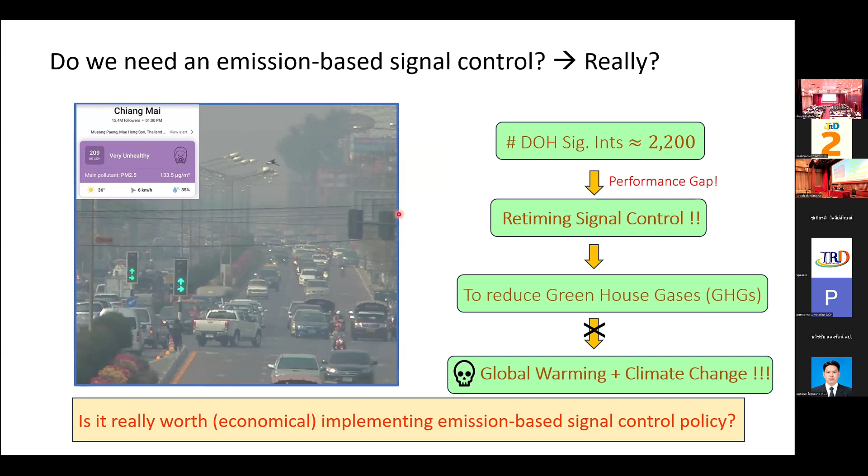Okay, so my presentation today is about emission-based signal control policy. Is there economic justification? First of all, let's take a look at this picture. This picture on the left, I took this picture in Chiang Mai a few years ago, and you can see from this picture it's a little bit hazy. This is not due to fog, but it's due to PM2.5, which is very unhealthy.

Okay, you can see that from the AQI index, which is 209, which is very high and very bad for the health. And from this picture, you can also see the signal control. Okay, so one of the straightforward ways that we think about this situation is, can we somehow relieve the pollution problem by using traffic signal control? Can we do that? If we can do that, it's a very straightforward way to do it.

Okay. In my Department of Highways, we have tens of thousands of intersections, but about 2,200 signalized intersections. So we aim that maybe we can do something with those signalized intersections. But there is a more fundamental question that we have to answer before we do it. Is it really worth economically implementing emission-based signal control?

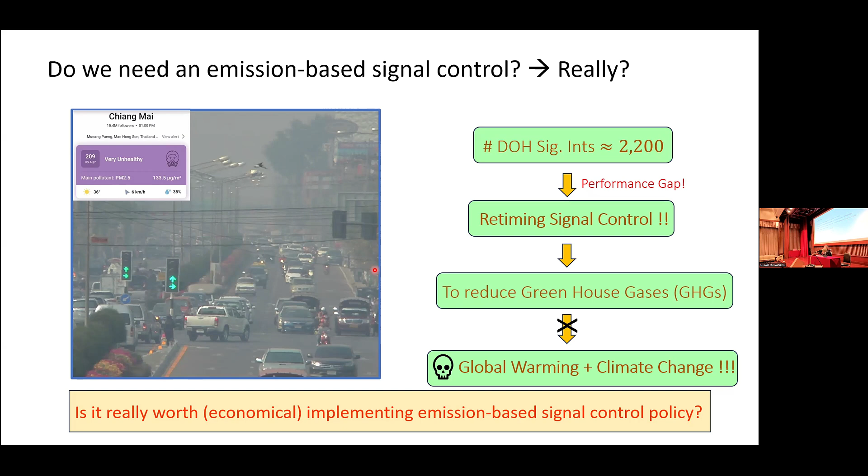This, I think, is more fundamental than doing it, because if you are studying traffic flow theory, especially in traffic signal control, you see many signal control algorithms. Okay, but I think this is a more fundamental question that we should answer before we proceed. So this is an overview of my presentation. First, I will talk about emission and delay signal control in brief.

Okay, then I will talk about the intersection fundamental diagram and the emission intersection fundamental diagram, which is similar to the macroscopic fundamental diagram. And I think MFD is very well known to most traffic engineers. And then I will talk about the marginal external cost of emission and congestion ratio based on the intersection fundamental diagram. And I will use this ratio as a guiding indicator whether we should minimize delay or whether we should minimize emission.

And then I will talk about some observations in Bangkok. And thanks to the Bangkok Metropolitan Administration, and I think someone from BMA is here today, thank you very much for your help, giving me data so that I can do this research.

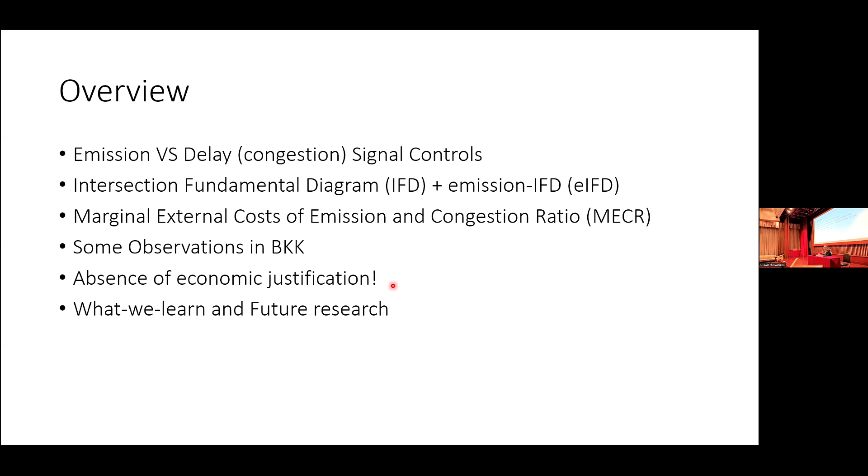And then I will talk about the absence of economic justification. And then I will summarize my presentation with conclusion and future research. So let's talk about signal control. When we talk about signal control, there are several performance measures that we usually discuss. The first one is delay. This is the most common one.

The second one is stop rate, or the number of stops per time unit. The third one is emission. And the fourth one is fuel consumption rate. Okay, the four major performance measures when we talk about signal control. And we know from the literature that when we try to minimize delay and we try to minimize emission, these two objectives give us two different timing plans.

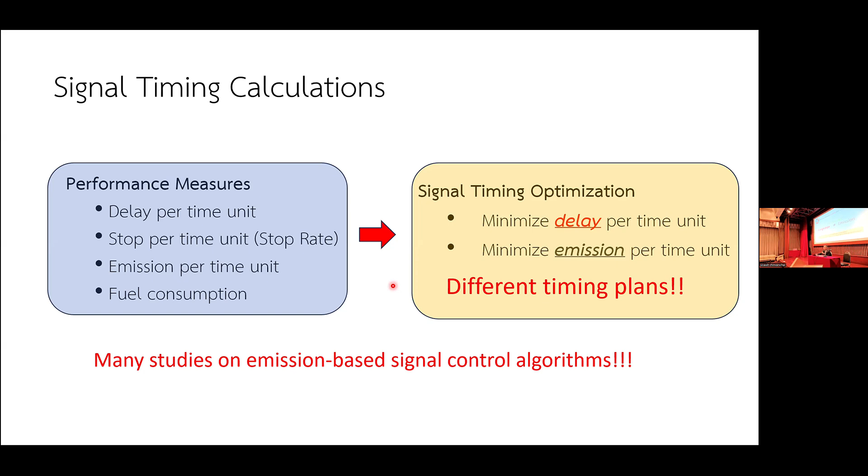Okay, and you can see from the literature, there are many studies on emission-based signal control algorithms. And I think some of the researchers in this room have, in the past, written papers regarding emission-based signal control. Okay. But when we talk about congestion and emission, we have to somehow weigh economically between the two of them. Which one is more important?

So in my study, I try to answer two questions. The first one is, is it worth implementing an emission-based signal control policy or not? And the second question I try to answer with this research is, in what traffic conditions should emission-based signal control be implemented? So these are the only two questions I try to answer.

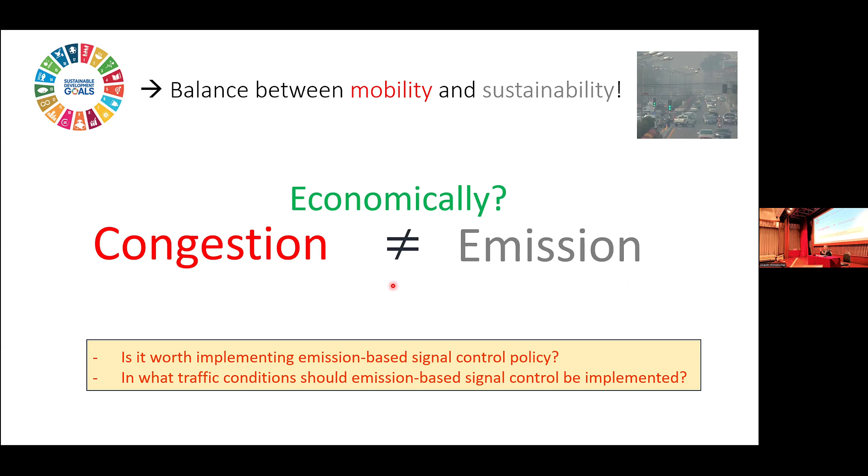First of all, let's talk a little bit about the macroscopic fundamental diagram. I think this work on MFD is very well known to everyone in the traffic flow theory field. And if someone gets a chance to read this paper by Professor Daganzo, in the acknowledgement, the data provided for this study was supplied by Kuwahara Sensei here.

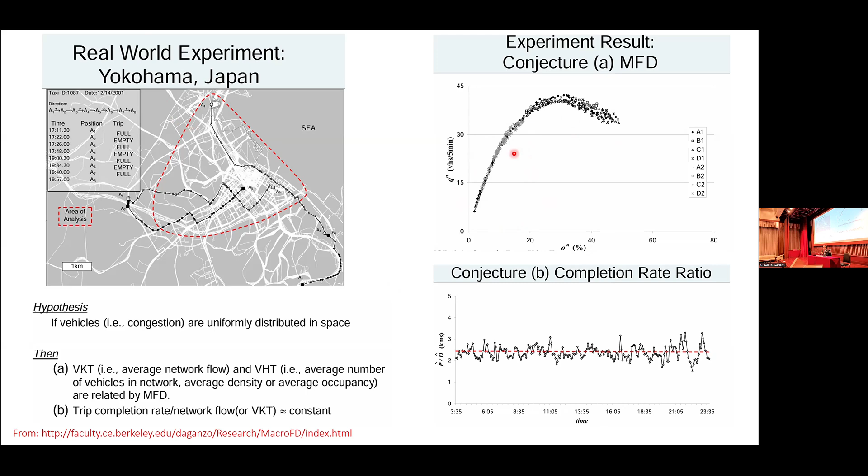So from the MFD, with certain assumptions, we can get the relationship between production and accumulation, which looks very nice like this. This is the starting point. The MFD concept applies to a network. So what I do with the signalized intersection is I scale down this concept a little bit to a smaller scale, to one intersection.

So if we have data such as the total travel distance and the total travel time that pass the cordon line that we define over an intersection, we can construct a very simple relationship between flow and density. We get something similar to the MFD, but at a smaller scale.

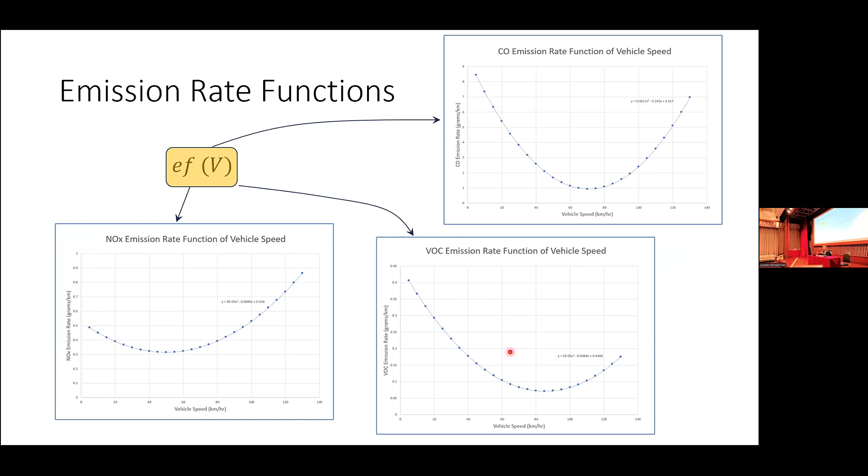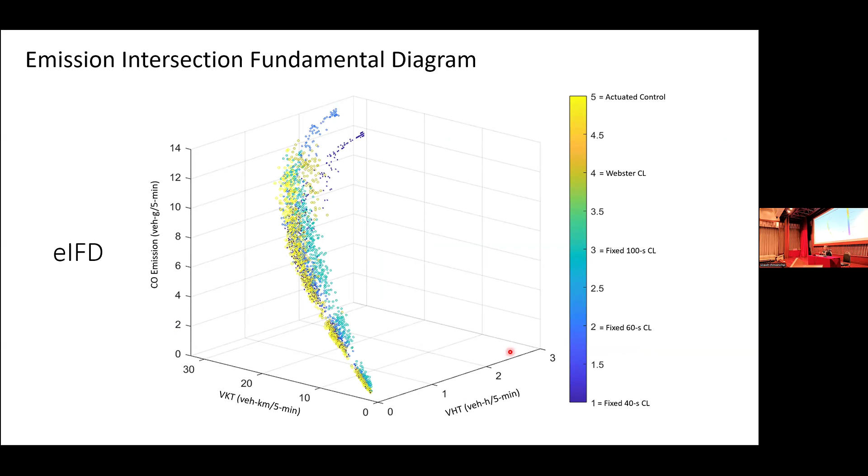And based on this diagram, we can calculate the marginal effect of adding one additional vehicle into an intersection. With this concept, we can calculate the marginal external cost of emissions and also the marginal external cost of congestion. I take the ratio of marginal external cost of emission over marginal external cost of congestion as a guiding indicator.

If this ratio is greater than 1, it means that the externality of emission is greater than the externality of congestion, so we should go forward with an emission minimization policy. But if this ratio is less than 1, the externality of emission is less than that of congestion. That means we should go forward with delay minimization optimization. So I do something very simple based on this concept.

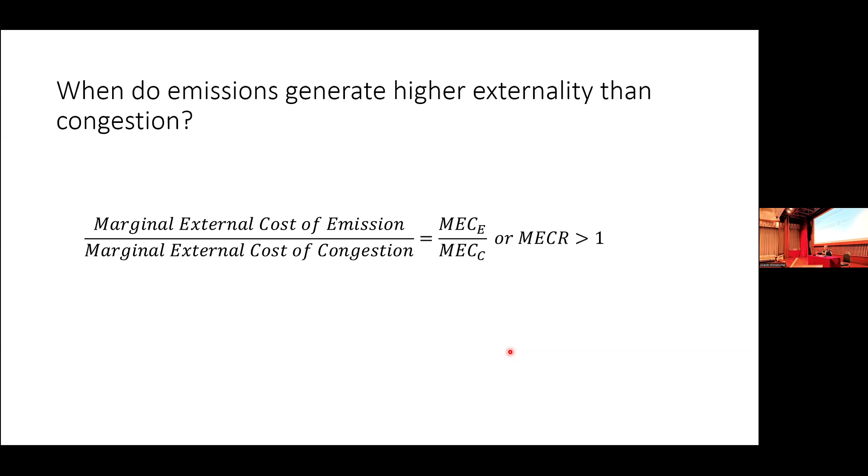I get the data from the metropolitan administration for 3 intersections, which are very near Chulalongkorn University. I think right now we are sitting somewhere in this location. These 3 intersections are very close to this location. The first intersection that I get the data from is the Charoen-Phon intersection, this one. And the second intersection is Prathumwan intersection. Some people call it MBK intersection, close to MBK.

And the last intersection that I get the data from is Ratchaprasong intersection, where when you go there you see people worshipping Phra Phrom, the golden statue, a lot of people there dancing, that kind of thing. These three intersections are among the most congested intersections in Bangkok, in the very center of Bangkok.

So I make certain assumptions for the value of time and the value of emission damage cost. I consider three types of gases: carbon monoxide, volatile organic compounds, and NOx. I got the value of the damage cost from the Pollution Control Department of Thailand. Maybe it's not relevant to other countries, but this is the most recent value that I obtained. And the value of time is from the Department of Highways.

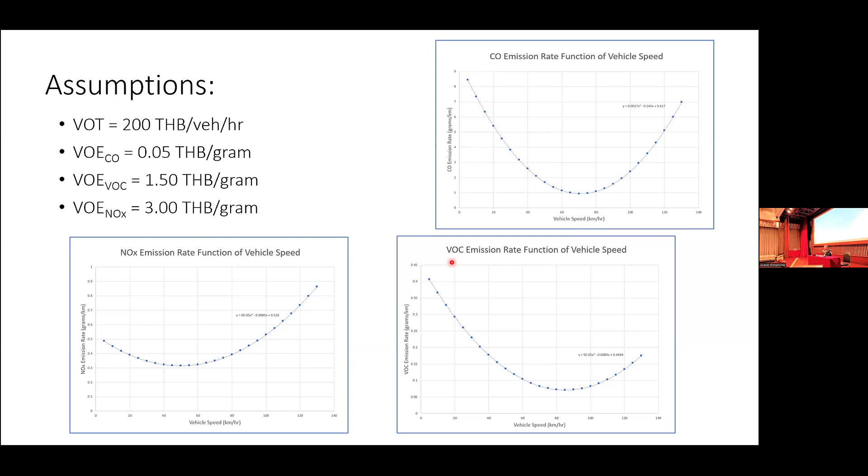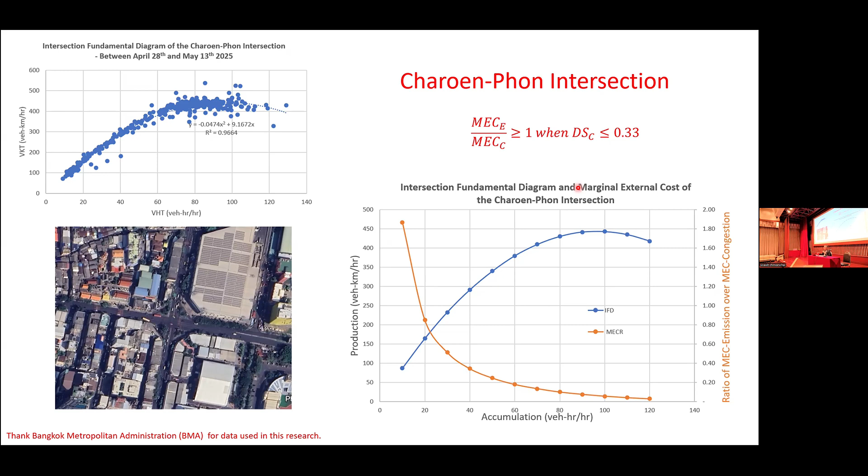Move to another intersection. The ratio is greater than 1 when the degree of saturation is less than 0.24, which is quite low.

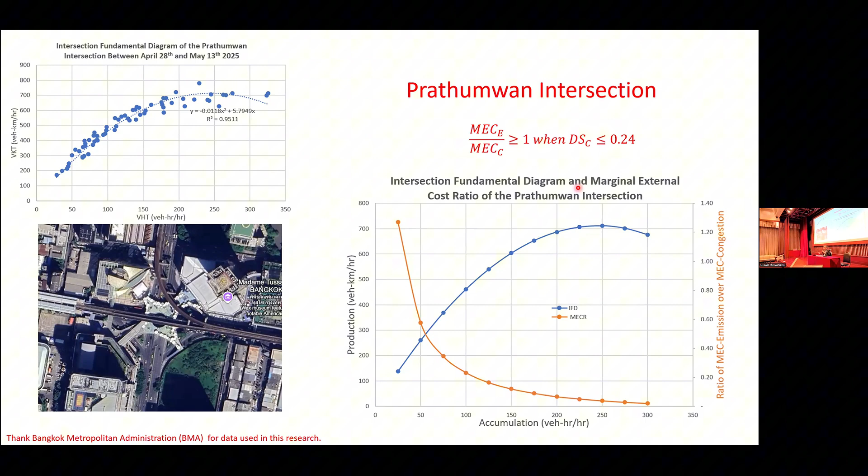The last intersection, Ratchaprasong intersection, the ratio of externality of emission over that of congestion is greater than 1 when the degree of saturation is less than 0.21, which is very low too.

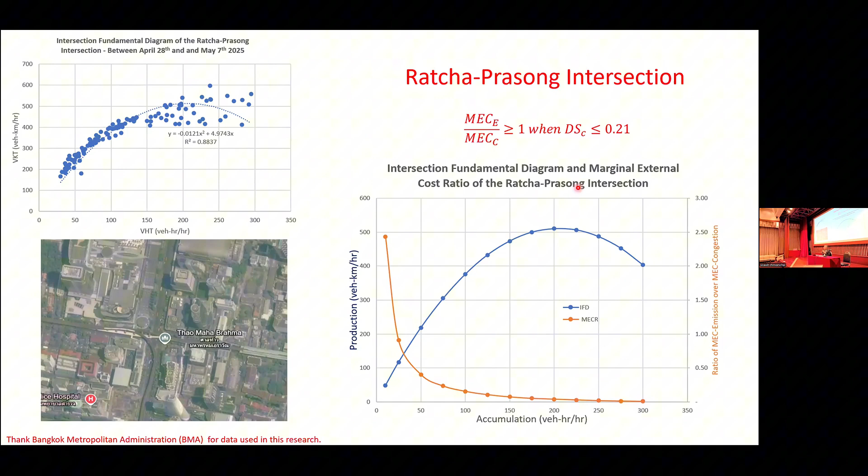So what we learn from this simple experiment is, as accumulation increases, the emission externality grows but slowly compared to externality from congestion. It grows faster. So therefore, at very low accumulation, this ratio is above 1, and it justifies emission-based control. But at high accumulations, this ratio is very small, much smaller than 1. So from the assumption that I made, this may warrant delay-based control when accumulation is getting higher.

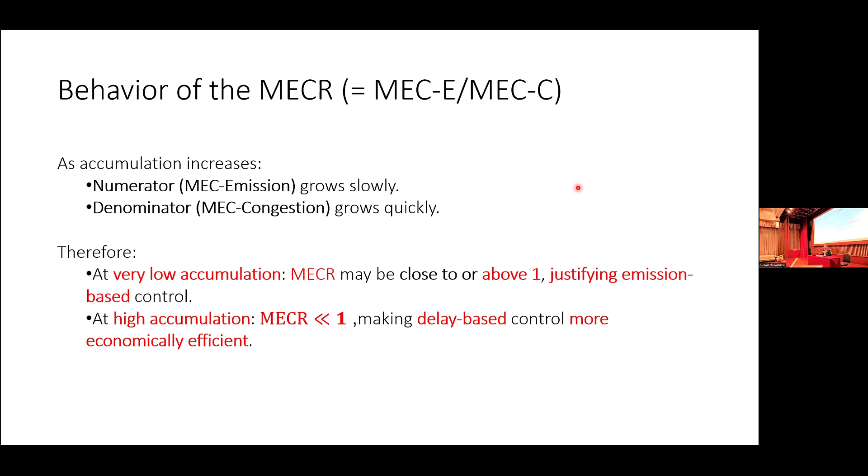So from the finding of this study, at moderate to high accumulation, we don't have economic justification for emission-based signal control when we have high accumulation or high degree of saturation. However, this depends on the value of time and the value of emission damage cost that I put there.

However, this finding I think is quite important, because when we try to implement emission-based signal control at very high accumulation, we might reach public dissatisfaction, and also we reduce operational efficiency if we try to do that at very high accumulations.

And also the absence of economic justification of emission-based signal control is, I think, a valuable insight, because if we try to achieve low emission, we cannot just do it by adjusting the traffic signal. We need something more. We need a complementary approach. Maybe we can go forward with electric vehicle adoption, or fleet modernization, or maybe we can implement a low emission zone. Signal control alone cannot achieve that.

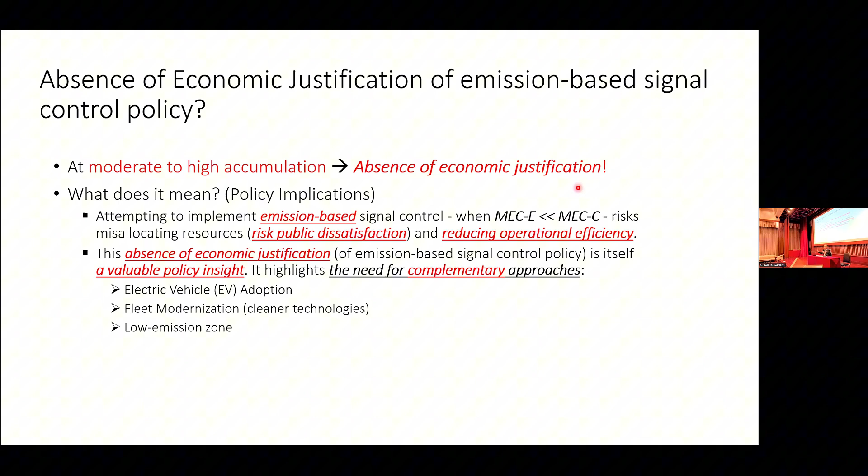So what we learned here, I try to summarize my presentation a bit. Emission-based signal control is not universally justified, and we also have to consider the hierarchy of externality. And maybe we need some complementary strategy if we would like to achieve low emissions, not just signal control. And signal control policy must be adaptive. We cannot just have one objective function. Maybe we have to switch. This depends on the traffic conditions.

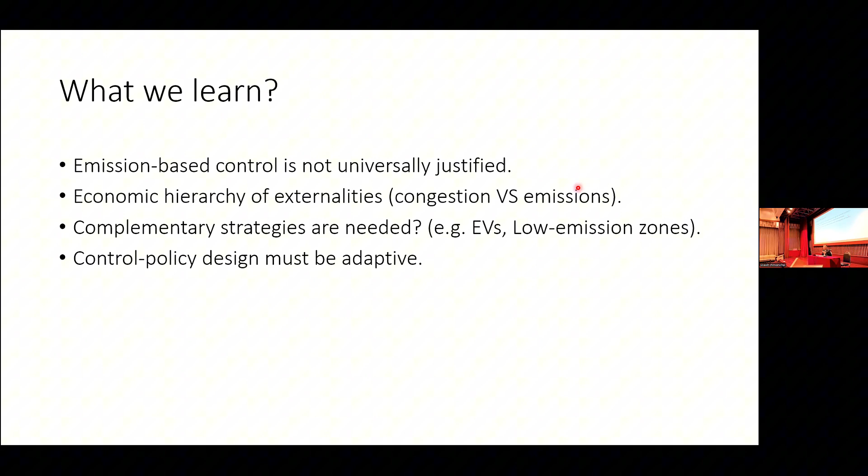And this is my last slide. For future research, I plan to integrate this ratio as a part of a real-time adaptive signal control system. Maybe we can consider it as a weight factor when we implement traffic signal control in the future. And next I would like to evaluate EV penetration impact on this ratio. And I think the most important thing is we should consider a broader discussion on externality and the social goal of traffic management. That's all I have. Thank you.

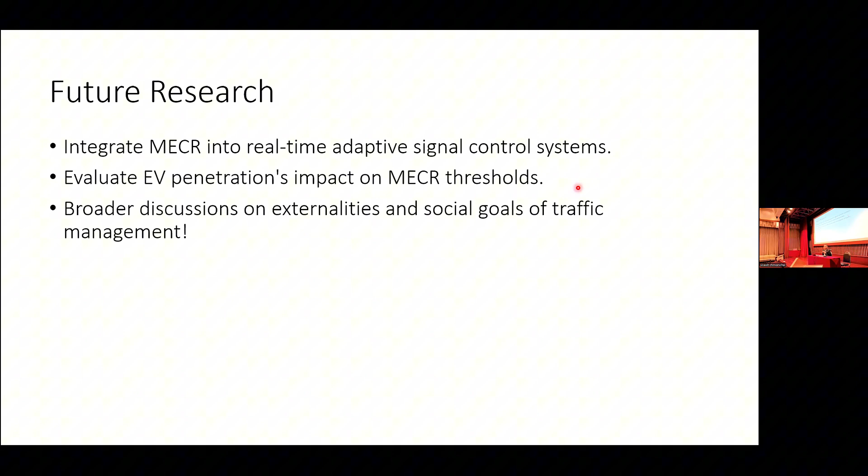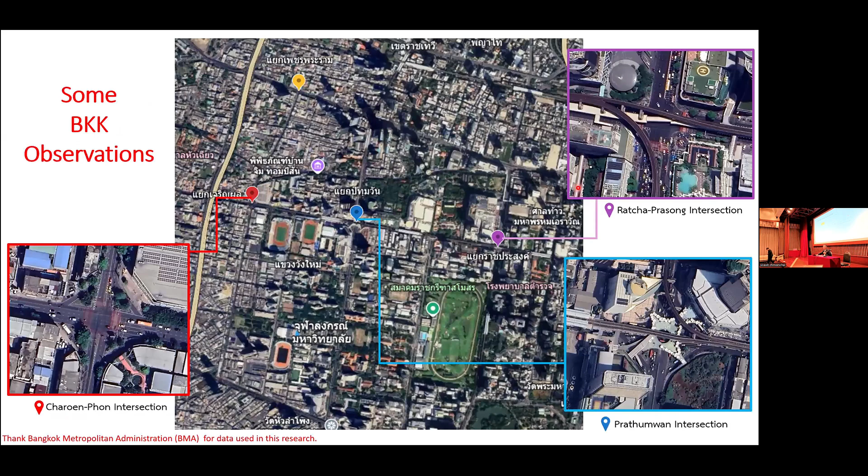Right? Therefore, this Q and K seems to me basically a function of the delay. Yes, you're right. But I add free flow travel time into the delay to get the travel time of each vehicle. So this curve actually depends on the delay. I wonder what the difference in the pattern is. It's quite similar, but I add some free flow travel time into it.

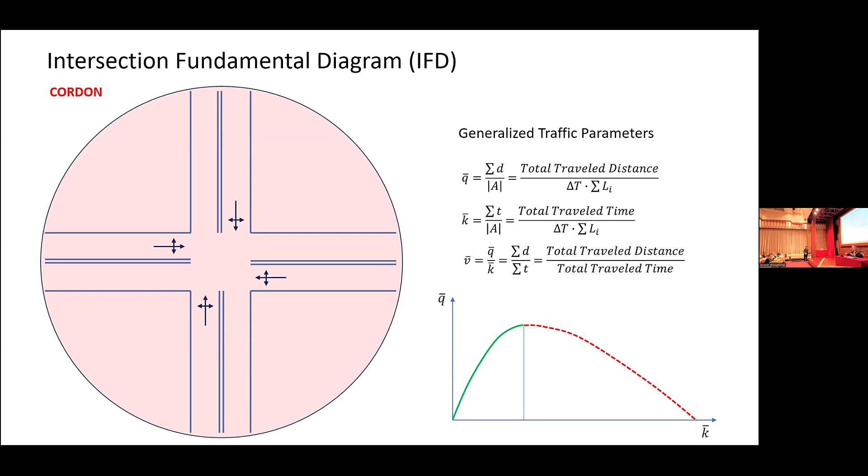Actually, I have one— oh, I have one more slide, but I didn't show it.

From my conclusion, I say that we have an absence of economic justification. But there are certain situations where this will change. My conclusion depends very much on the cost of time and the cost of emissions. The change would happen when we value emission damage cost much higher than what I do now.

This can happen when we have an air quality crisis—for example, in Chiang Mai, the value that I use in this experiment might not be applicable, because there are a lot of people who get sick from air pollution.

The second one may be equity and externality: if policymakers weigh public health and environmental justice much more important than congestion or commuter time, this will change.

Also, if we have some new technology, for example CAV vehicles, maybe they can coordinate with each other and provide a smooth driving situation. In that case, the balance of my conclusion will shift again.

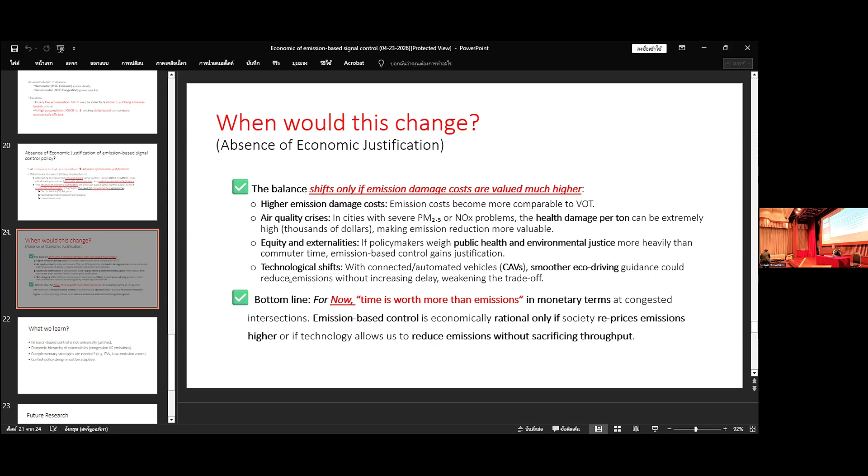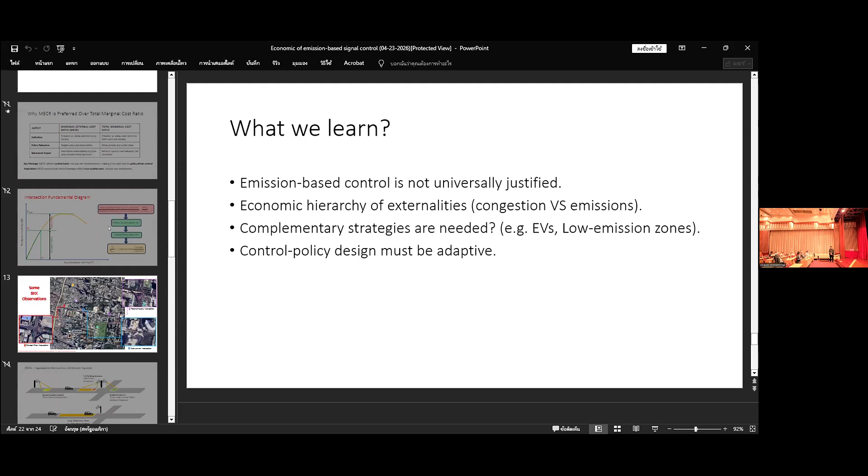Thank you for your presentation, I'm very interested, but I have a question. I don't understand why the IFD decreases—why does the right-hand side decrease? Why does the line decrease, so Q decreases—why?

I guess so—your problem considers the situation with the queue downstream of the intersection, right? So in my understanding, you want to make some signal control using this, right?

If so, usually we consider no queue downstream of the intersection, because if there is a queue downstream, the congestion effect does not appear, so signal control cannot improve the traffic situation.

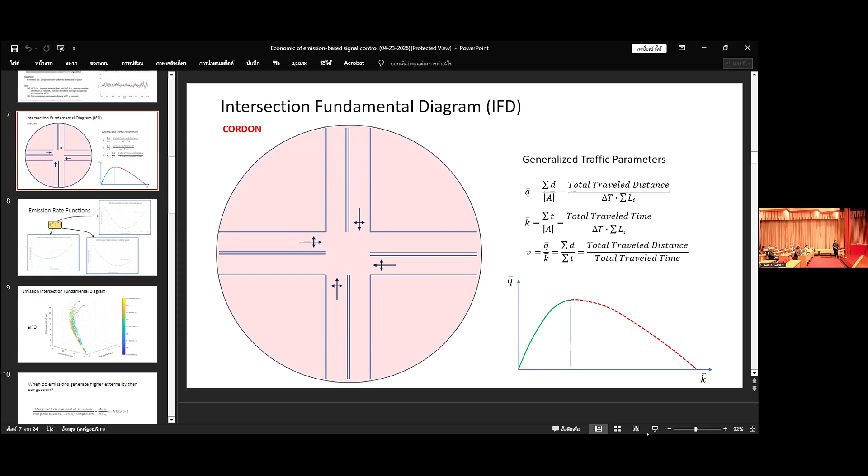This is the data I got from DMA. As you can see from this slide, I put the dotted line for the red line because in simulation it never happened—I simulated one isolated intersection, so it never got blocked, the downstream link never got blocked, so I have only the green part. But the data I got from DMA, sometimes the downstream section gets blocked.

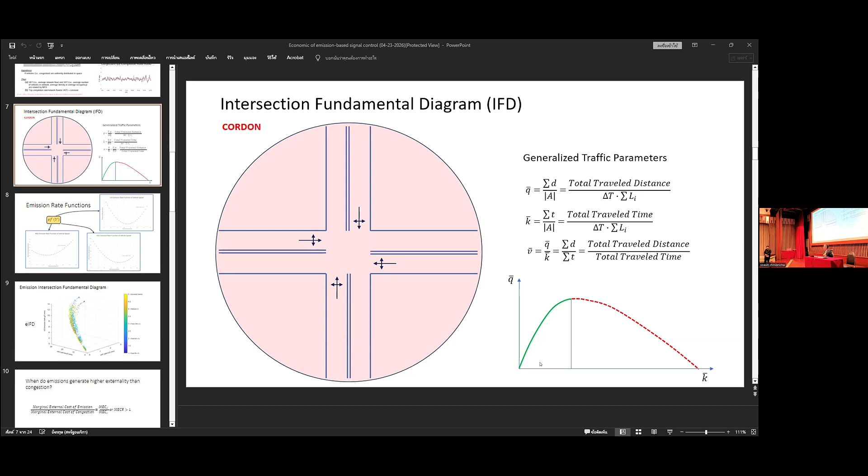So your analysis has been done including the situation with congestion on the downstream, right? Okay, yeah, it's very interesting. I put the dotted line because it never happened in simulation.